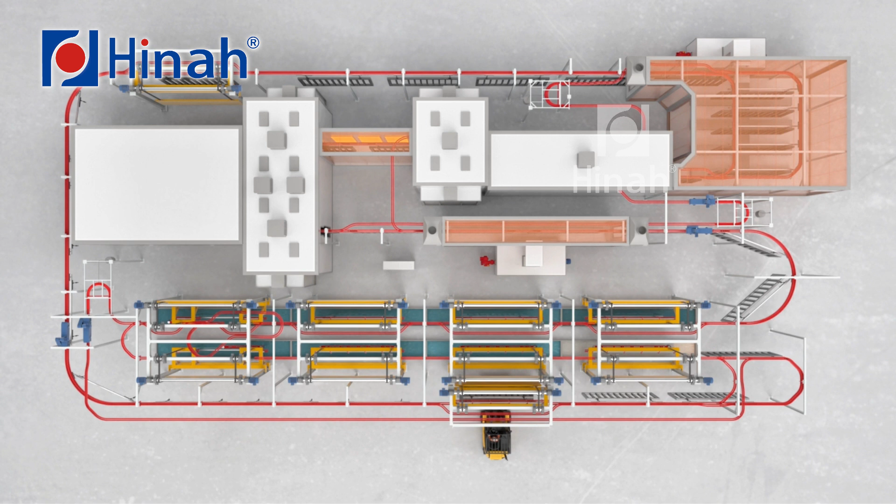Functional areas introduction. Loading. Degreasing: dipping and spraying. Pickling: dipping and spraying. Activation. Zinc phosphating: dipping and spraying. DI rinsing and spraying. Dry oven.

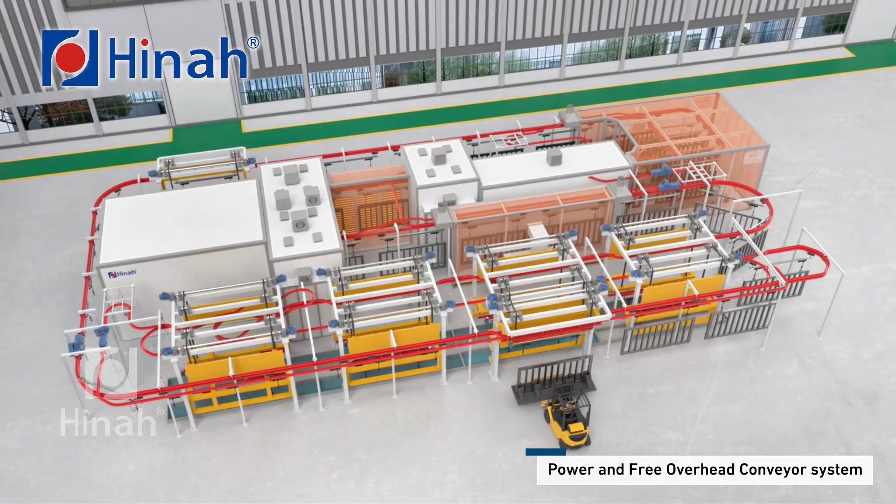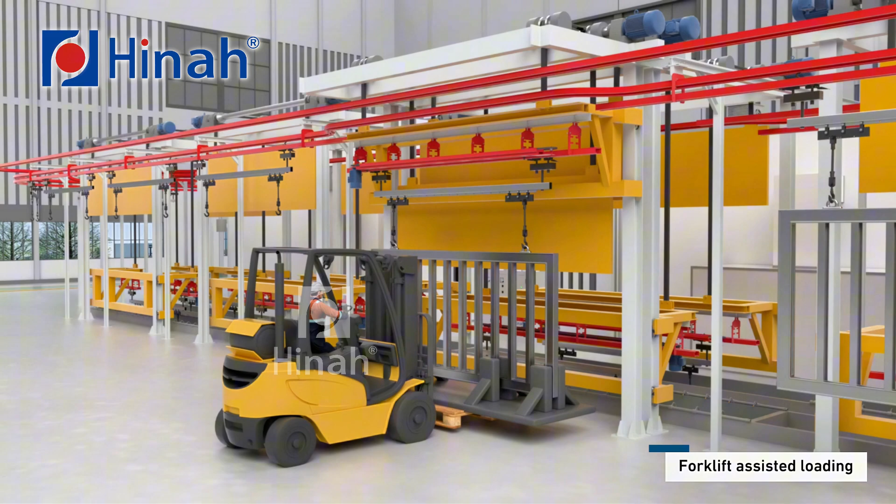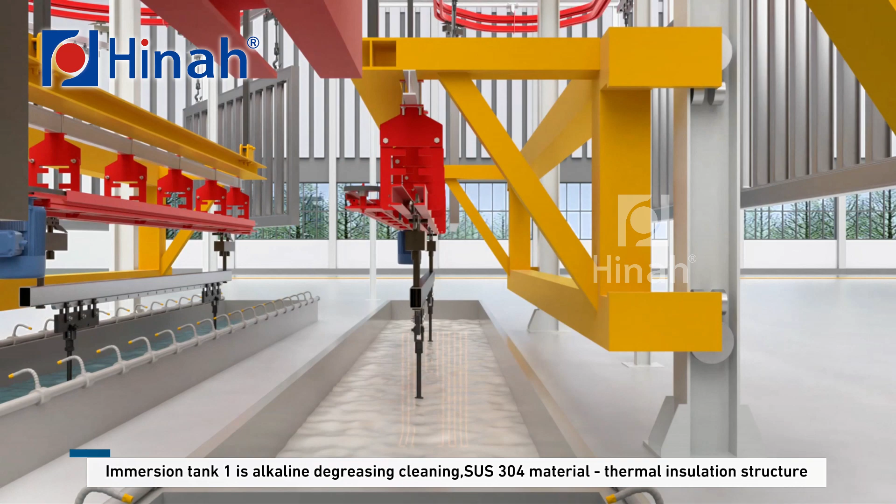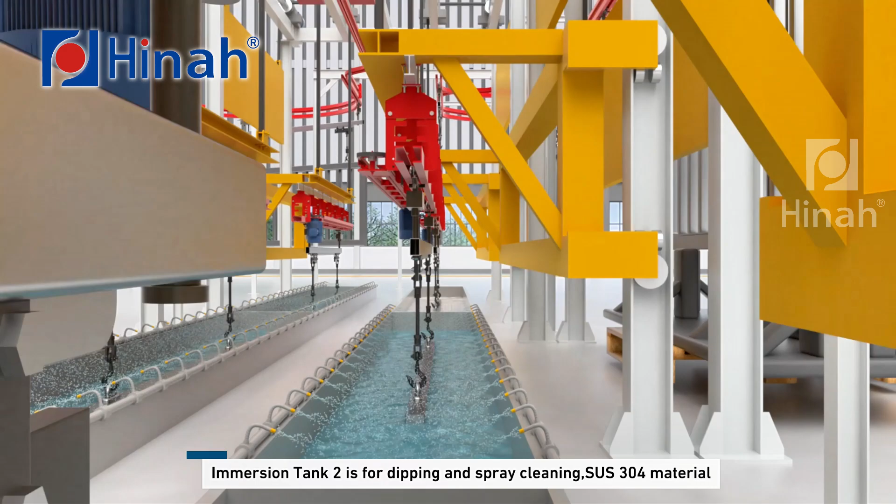Immersion tank 1 is for degreasing cleaning. SUS 304 material. Thermal insulation structure. Immersion tank 2 is for dipping and spray cleaning. SUS 304 material. Immersion tank 3 is pickling. SUS 316 material. Thermal insulation structure.

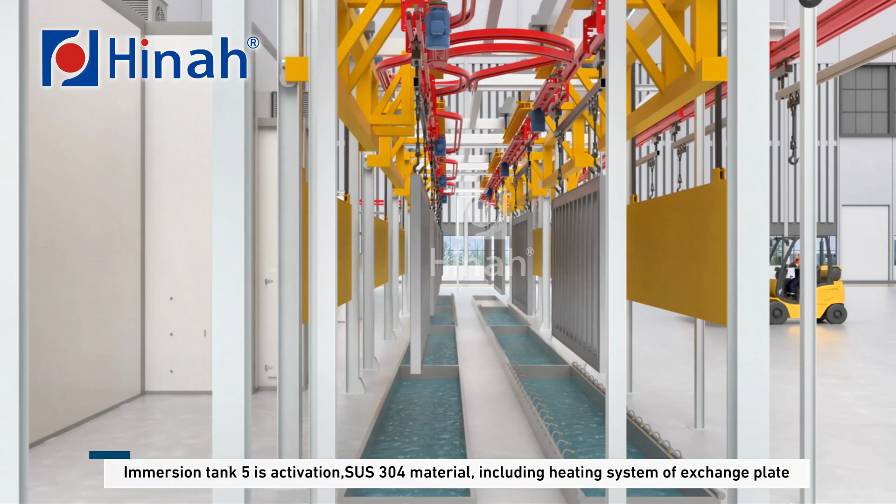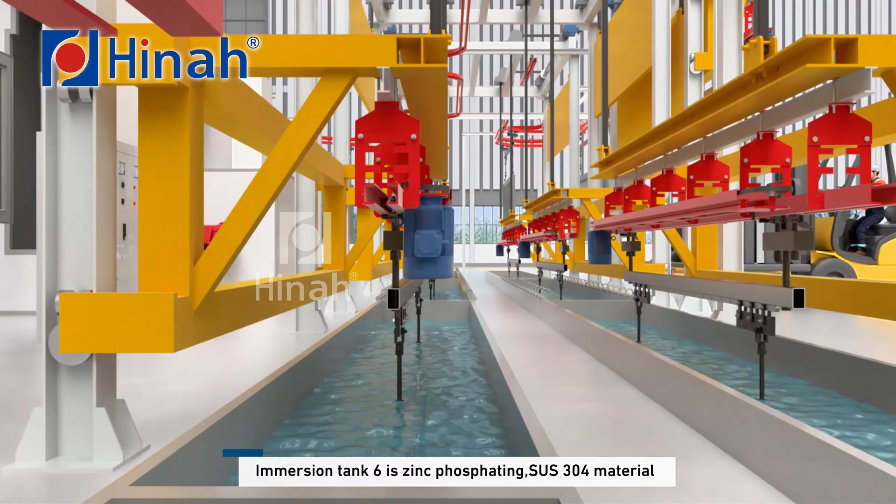Immersion tank 4 is for dipping and spray cleaning. SUS 304 material. Immersion tank 5 is activation. SUS 304 material, including heating system of exchange plate. Immersion tank 6 is zinc phosphating. SUS 304 material.

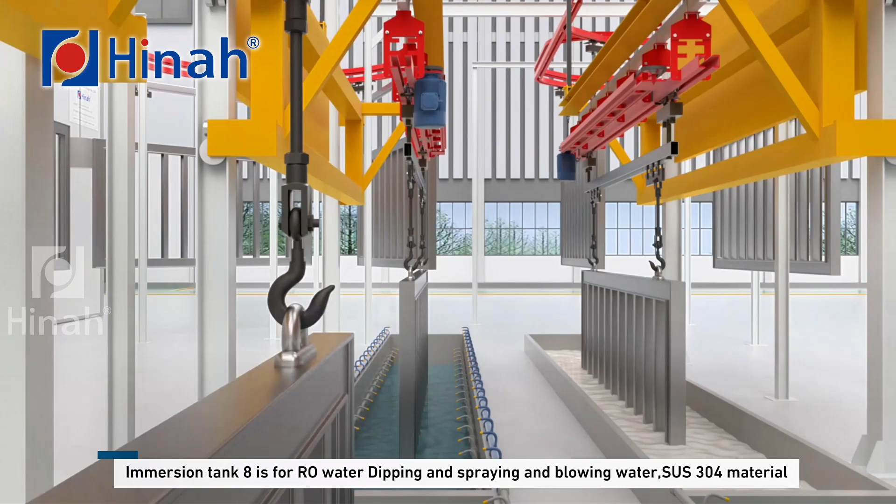Immersion tank 7 is for dipping and spray cleaning. SUS 304 material. Immersion tank 8 is for RO water dipping and spraying and blowing water. SUS 304 material. The workpiece enters the drying oven for drying.

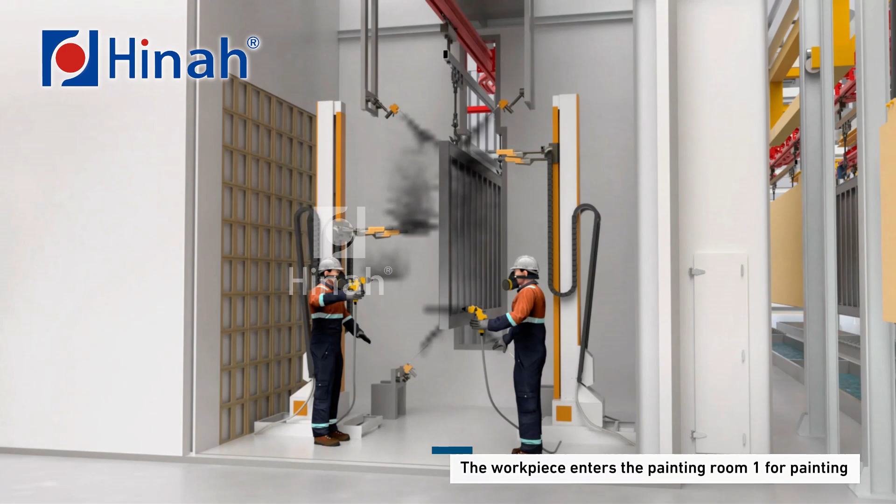The workpiece enters painting room 1 for painting. The workpiece enters leveling room 1 for leveling. The workpiece enters painting room 2 for painting. The workpiece enters the heating chamber for surface drying.

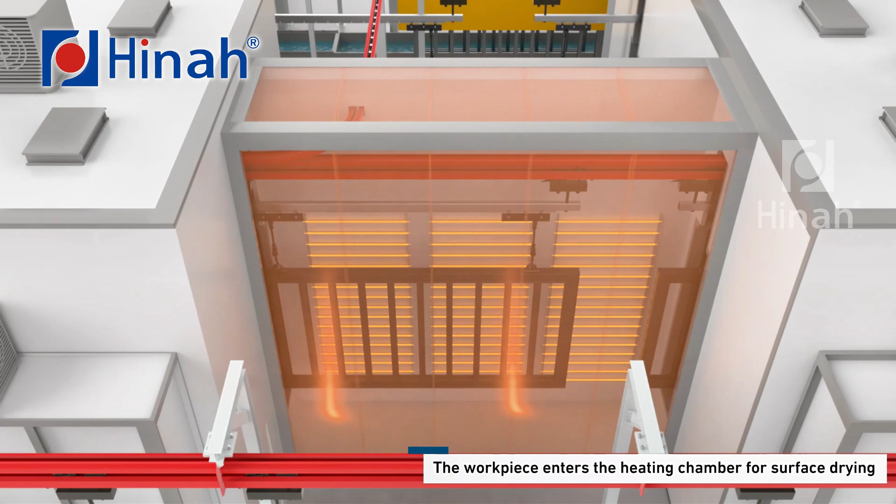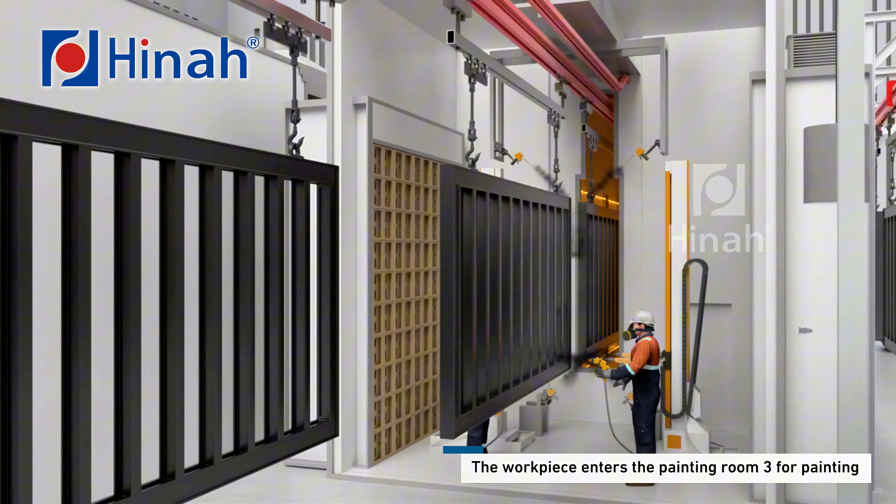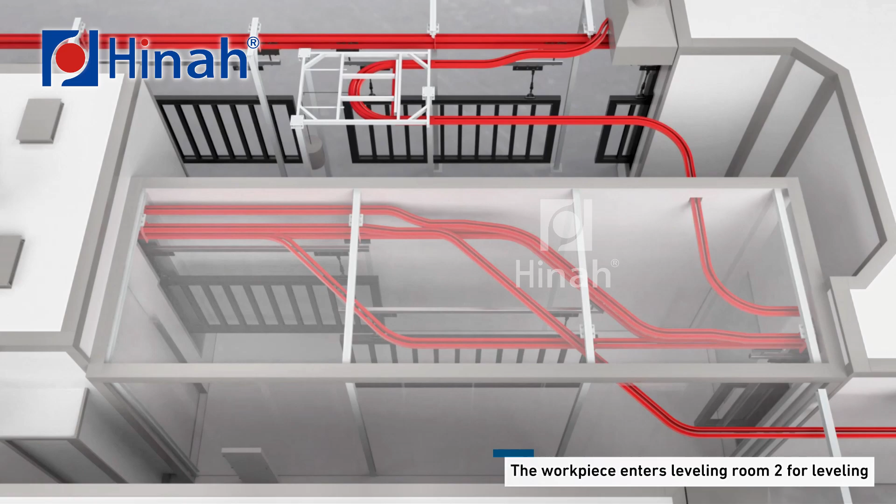The workpiece enters painting room 3 for painting. The workpiece enters leveling room 2 for leveling. The workpiece enters the curing oven for curing. The workpiece enters the cooling area. Forklift assisted unloading.